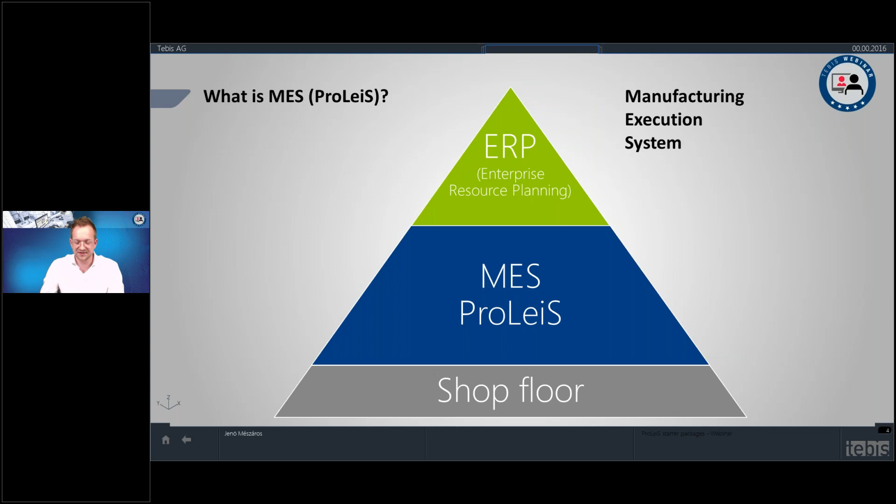So therefore, we have Proleis. Proleis fits in between these 2 levels perfectly to make sure that whenever you get a new product, a new project, it gets planned directly through Proleis into the shop floor level, so that all the operators know what to do next without spending a lot of time just for team meetings.

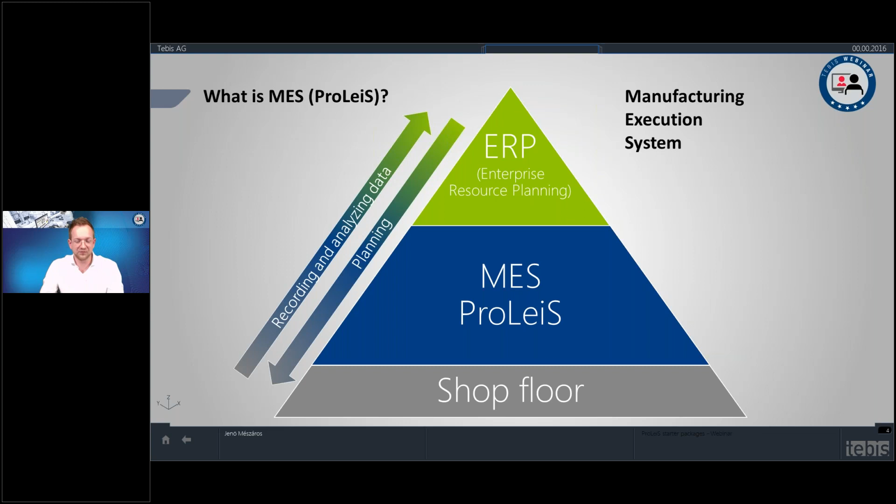And the same way back, when you produce your product, you would like, of course, at the end, to analyze the data. So, of course, you would like to know what actually happened during the time where you manufactured the product. How much time did you spend? Was the calculation correct? Did you win or did you just lose money with that calculation? And this is where Proleis as MES software helps you.

In between all these milestones, you have different departments and different operators working together on one project. So for example, when somebody is doing the detailed planning for the shop floor, he needs to make sure that the material which you might not have in stock is getting ordered and delivered before you actually need it at the machine. You need to make sure that the NC program is ready before you go to the machine.

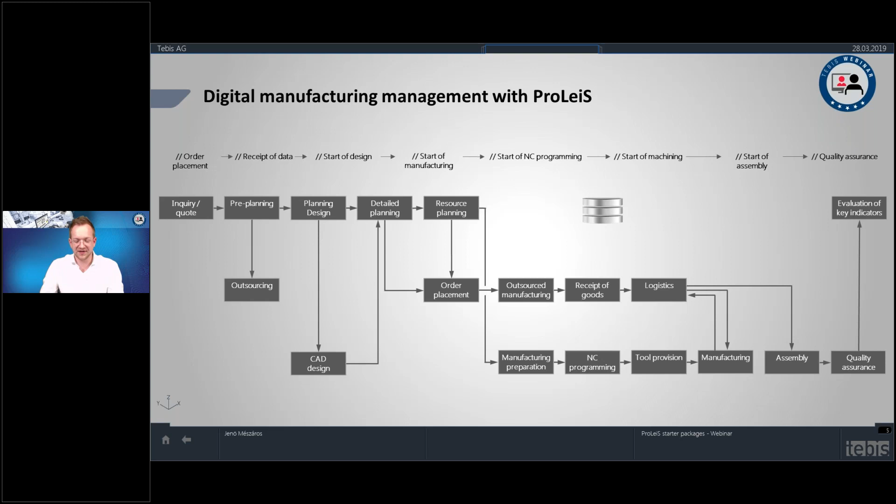And you need to make sure that everything is up and ready in the assembly area before the assembler actually gets started working to assemble your product. So you see, all these different areas need to work together. They need to work hand in hand to make sure that your production goes really smooth.

And to do so, you need to monitor your project. And this is actually where Proleis helps you. Proleis, as a server-based project monitoring software, or as an MES software, helps you to monitor all these different areas. Proleis is connected to all the different operators, of course, and to the machines. And whenever something takes a little bit too long, Proleis will immediately see that and can help you fix the problems before they begin to be real problems.

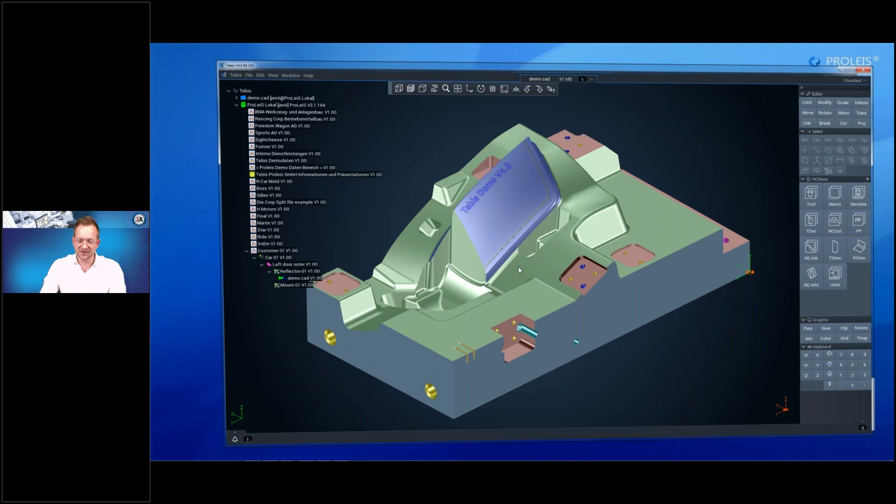If I check in the file again, it gets saved back on the server and it will be available for Peter. If Peter checks out the file, it gets blocked again. So when somebody is currently checking out the file, you can still have a look at the old version of that CAD file. You can still open and read it, but you cannot really change this file as long as it's checked out by another person.

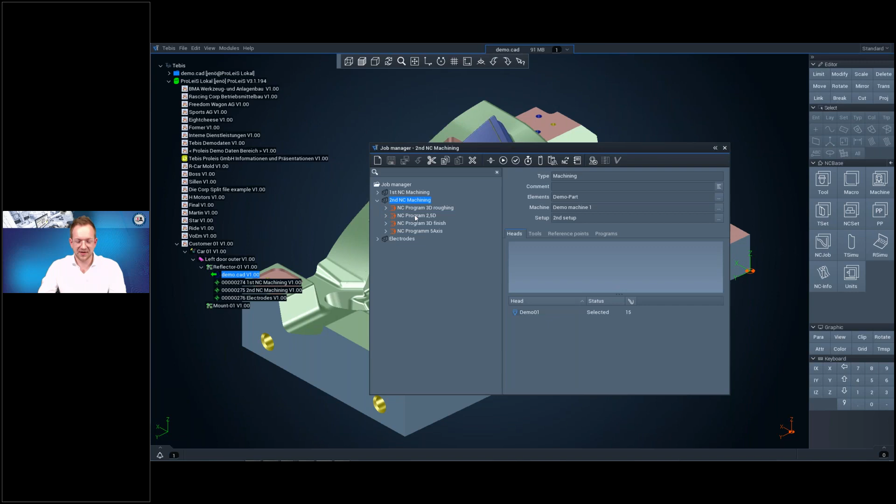So let's do a program for this file. Go to my NC job, and I just create a new program which exists already on that file.

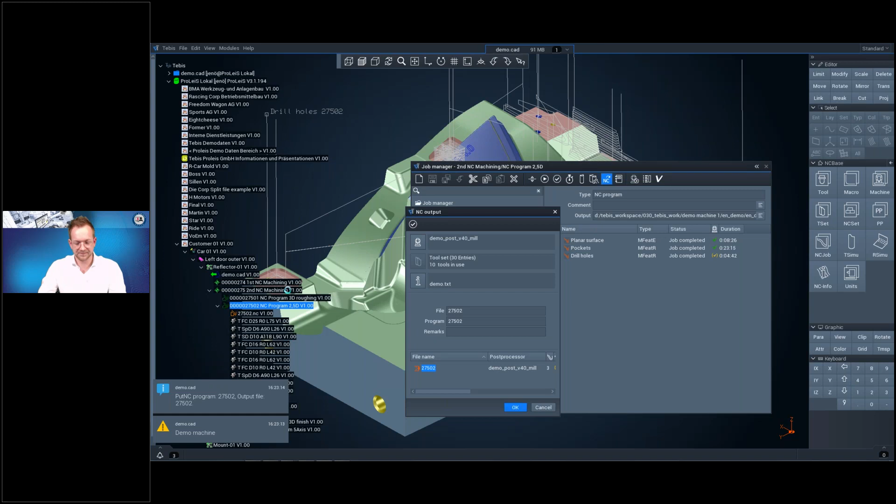What I see already on the left side is that something happens underneath my CAD file. There's a new folder structure and different files currently get created while Tebis is working on the NC program. So what happens here actually in the background? Tebis has created folders for all these different programs underneath my CAD file. And the one I would like to create, or actually created, got attached underneath my project as well.

So I do have the NC file itself underneath my CAD file, which I could also like to open if I would like to, with the notepad, for example.

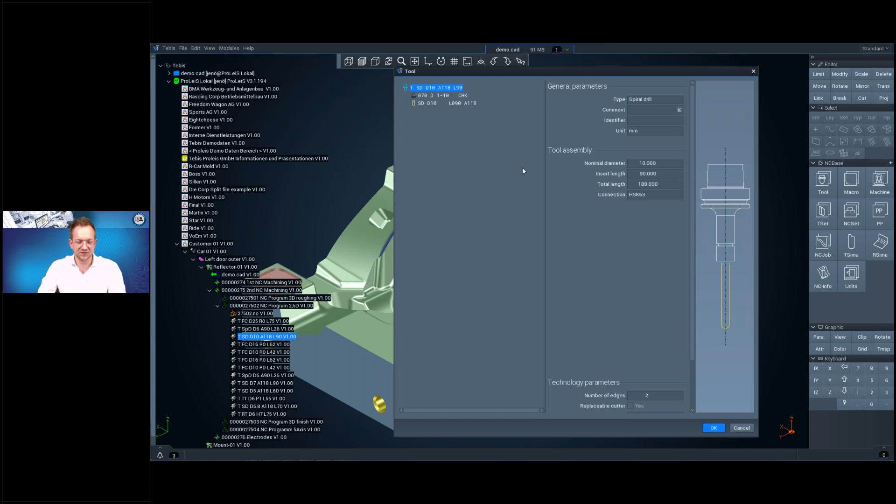Underneath the NC file itself, I also have information about the tools being used for the NC program. This information is visible for everybody working in Tebis. For example, operators on the shop floor with the Tebis viewer can just have access to the tools necessary to do a program.

But even more interesting is that you can send your program directly to the machine. This program gets sent to the machine as a copied file, so that NC program file will get available directly at the machine. Nobody has to copy it manually or go to a Windows directory to search for it and find it. It just got sent directly to the machine over the network. This is something I can do directly in Tebis.

Once I have done this, I see this little blue-green icon on the NC program, which tells me that the program got sent already to the machine. So whenever I change anything on the CAD file, I know this program got already sent, and I'll be able to make sure this specific file gets deleted so that nobody's using maybe an older or wrong version to do the machining.

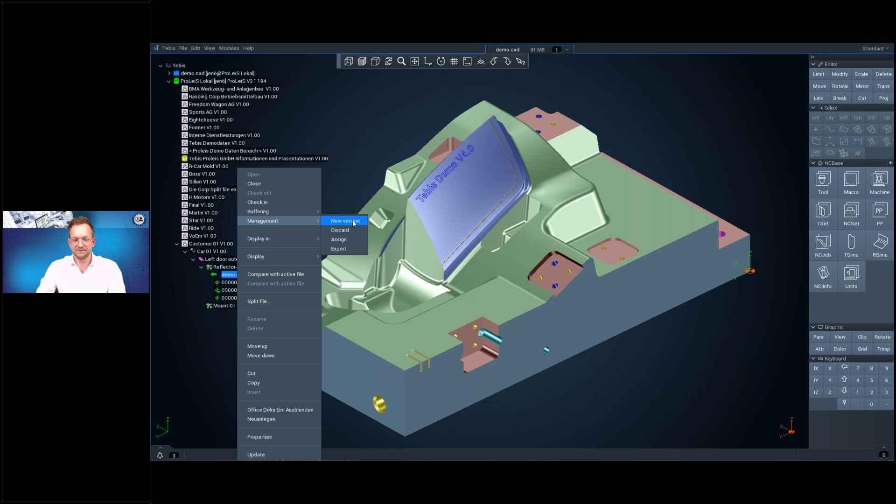Once I change anything on this CAD file, I'll be able to save it as a new version. If I do so, a new version got created called version 1.01. At the same time, I got question marks on my programs where Tebis is telling me the program got created with a different version of the CAD file. So an older version of the CAD file was being used to create this NC program. It might be possible that this is not correct anymore.

So let's have a look at some new, more possibilities we have on here, and let's use another example. Again, I look for a CAD file I would like to upload and attach it directly to my project.

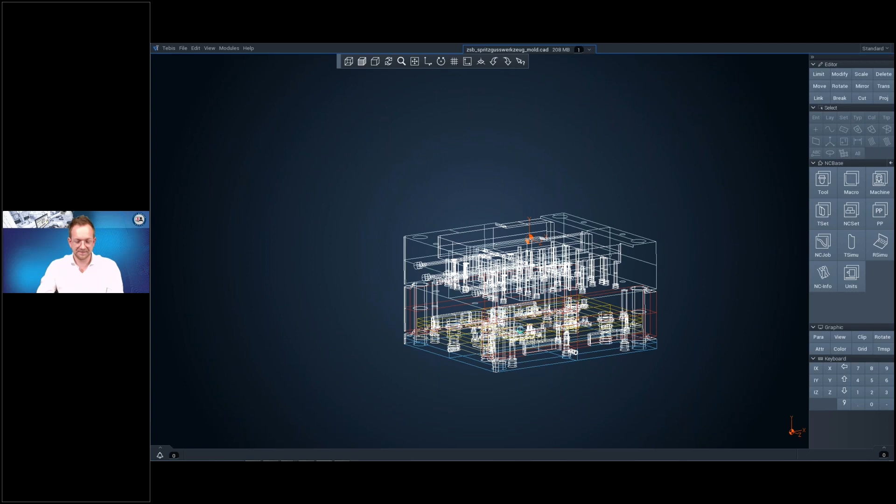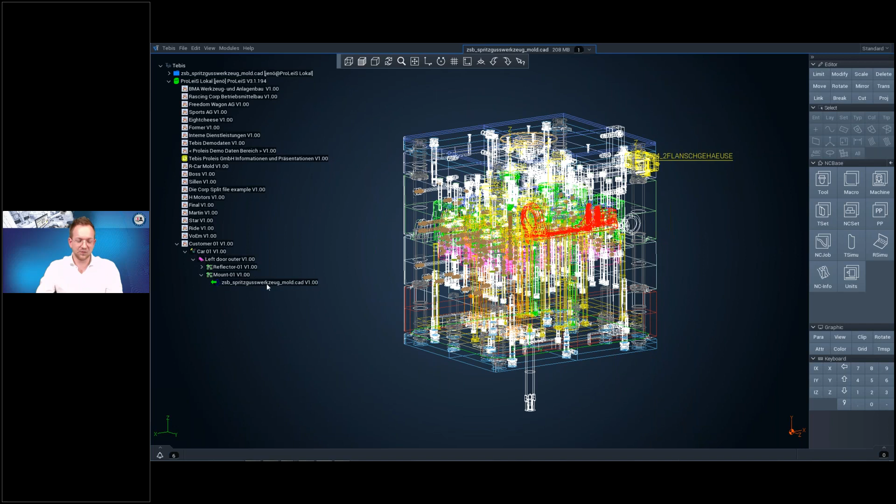This CAD file is a little bit different to the other ones. It's a complete mold with all its single parts, already assembled, with every single part inside that specific CAD file. I got this CAD file actually from the design department and imported it to Tebis. As I see here, it has a proper layer and filter structure where I have all these different single parts as a different layer available.

So what is normally my work before I start working on the NC program? The first thing would be separating these single parts into different CAD files to make sure I can change these files and prepare the NC program without changing anything on the whole assembly. To do so and to make it easier for you as operator, we have the file splitter. This little tool helps you separate components and parts into different CAD files.

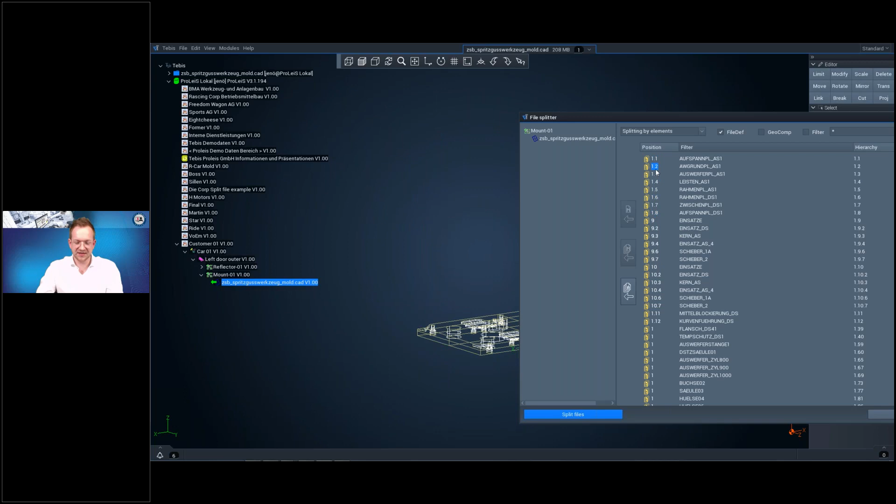It's pretty easy to use. You just select, with Control or the Shift button, for example, the positions you would like to separate. The position I have selected gets displayed in the background, so I can easily realize which one I currently selected. I then have to create a new subfolder structure, which you see already on the left side, one folder or one position per component.

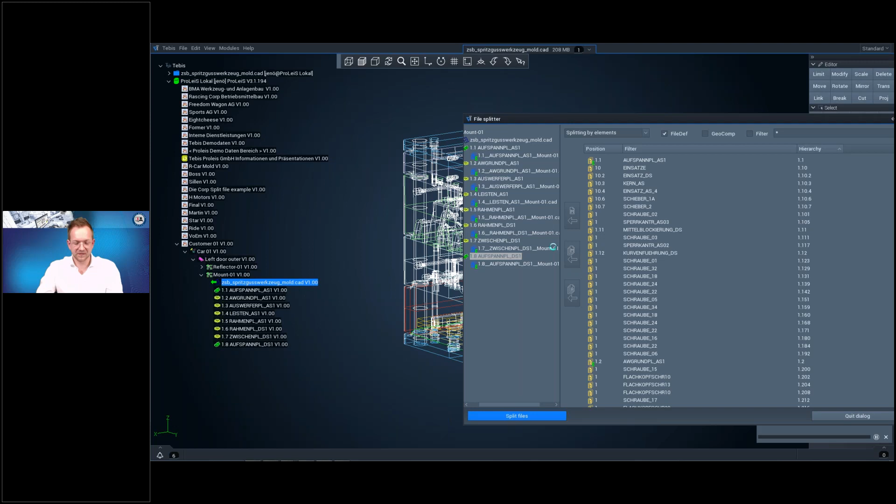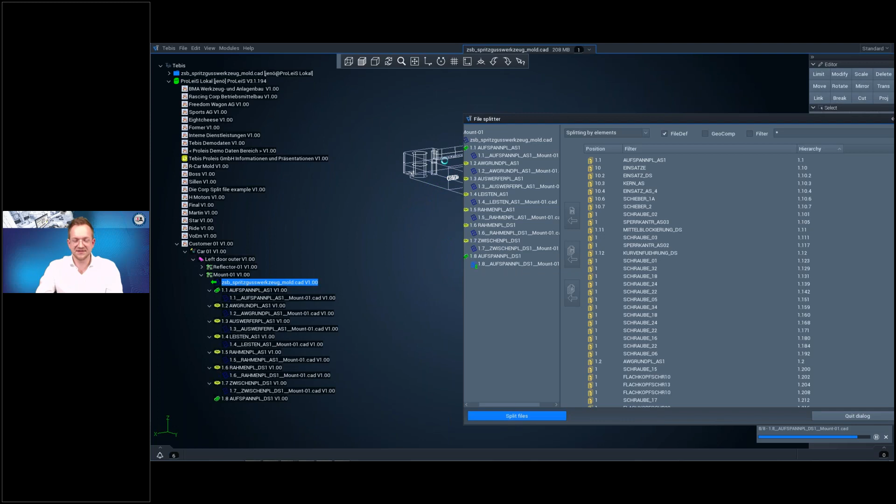And once I split the files, Tebis creates for each single component a new CAD file, which only includes the information of that single part. So you can split, really easily and in just a small amount of time, this complete assembly into separated CAD files, into separated files, to make it possible for the NC programmers to start working on this.

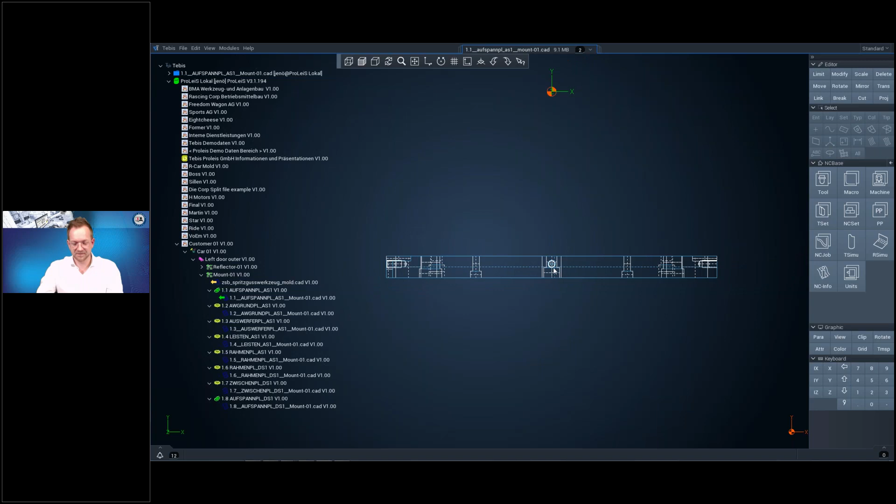So let's have a look. This is still my whole assembly. Let's go to one of my plates, position 1.1. Once I open it, I see that this is really just a single component, and I don't have anything else inside my CAD file.

So again, this file got attached to my project, and this CAD file got separated automatically by Tebis using the split file functionality. So my NC programmers can now start working on this project, and there they can work on different parts at the same time just because I got them separated.

One more piece of information: all these files got not just separated, they are also immediately attached to my whole project and to the Proleis data management. So I don't have to upload them manually anymore. They just get uploaded automatically and are available and visible for everybody working with Tebis and Proleis data management.

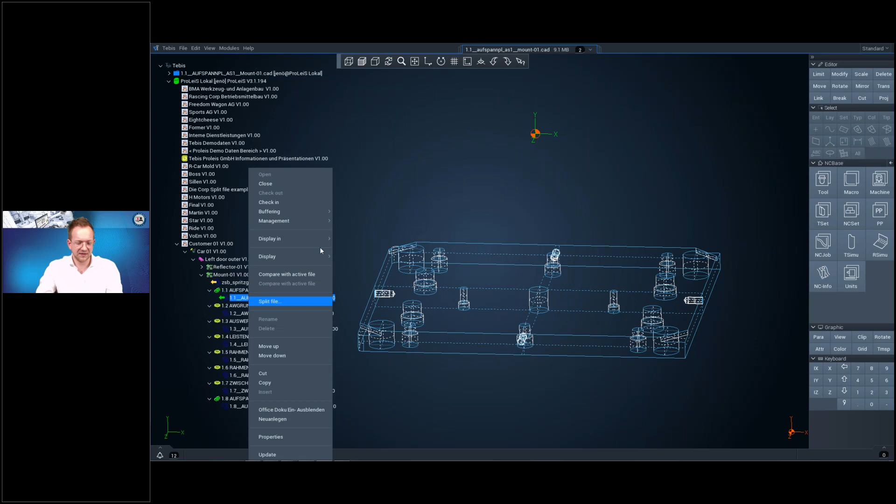So, but what happens actually when a designer changed anything on this assembly? This is pretty important. One of the designers has changed something on one of these components and gave me a new CAD file, which I need then to import to the system as well.

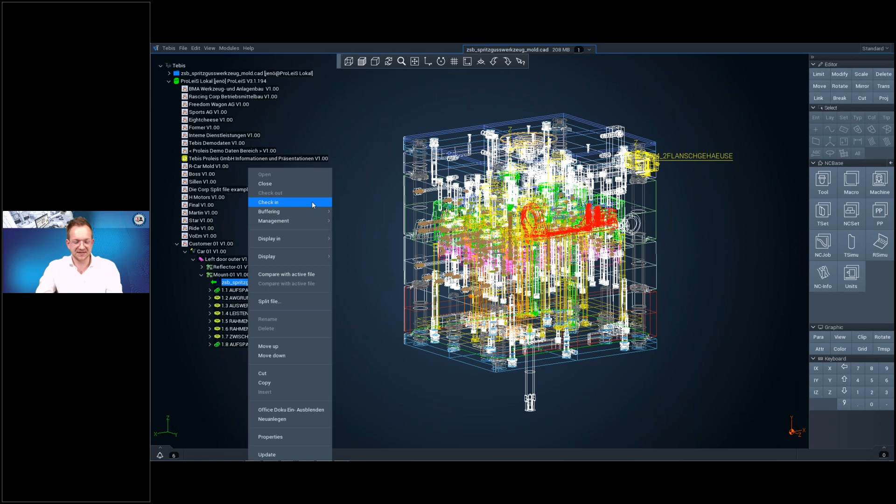But as I said, I don't really know what they have changed. So let's get through this example. Let's get checked in my file again. The very first thing I have to do is upload the new file I got from the design department into the...

Proleis data management. Tebis will realize already that this file already exists. So now I can tell Tebis I would like to keep it as a second file, attached as a second file, and the older one will not get changed at all. Or I can overwrite, which means it will bring it into the system but create a new version. So now I don't have version 1.00 anymore. Now I have version 1.01, which is the CAD file I just uploaded to the system.

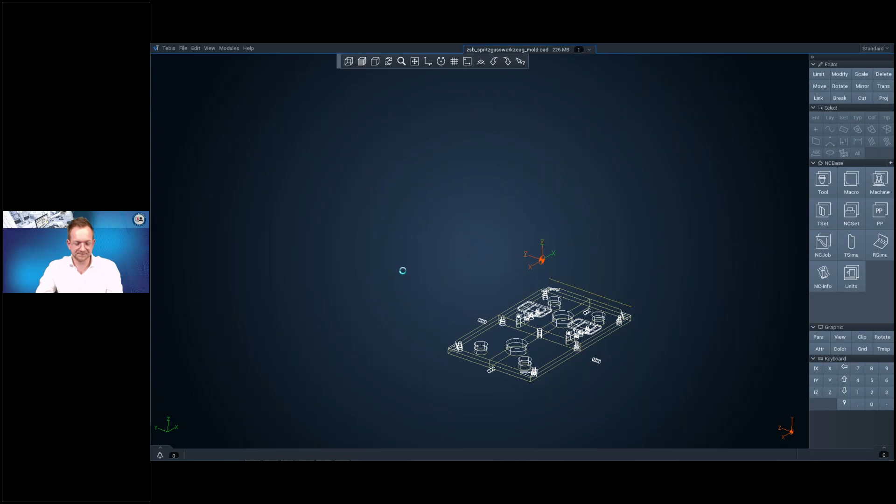Let's check out this file again, bring it to my local system, because I would still like to know what the designer has changed.

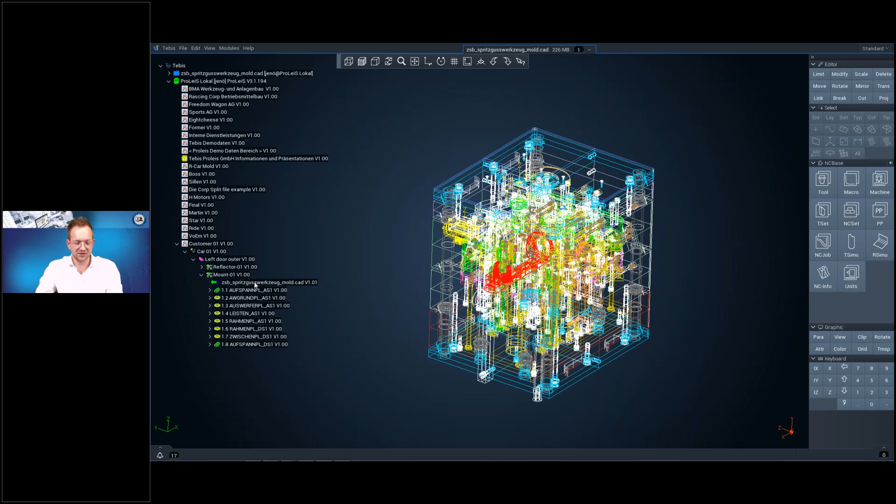So once checked out, I use the same function in Tebis again, the split file function. And I again would like to have a look at the first 8 positions, the first 8 components of that assembly. But this time, before using the file splitter, I activate the function GeoComp to compare the geometry of each single component.

So what is Tebis doing now? Well, Tebis is again separating the single components and attaching that to the Proleis data management, but only if anything has changed on the geometry of a specific component. If there was no change done, then it will not create a new single split file. So again, Tebis checks if there was a change done on any of the geometry of the single components, and only when there was a change, it will create a new CAD file.

This is a really big time saver. Of course, this time Tebis needs a few seconds more because it will check and coordinate every single component before it creates a new one or not.

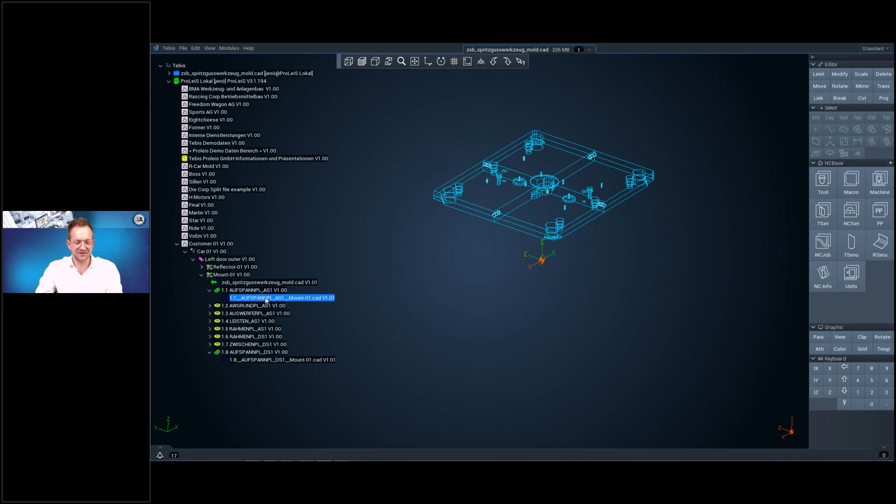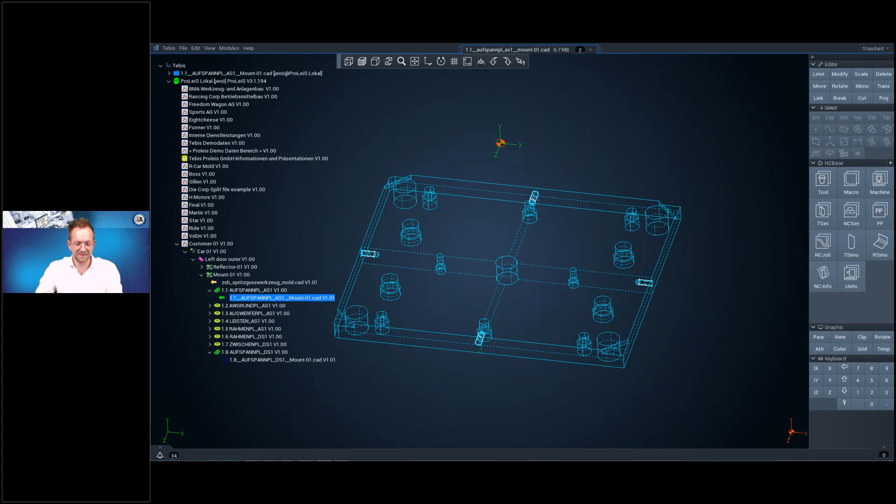So let's figure out what actually has changed on this plate. To do so, I can just make a right click on it and compare with the previous file. Here I see all the previous versions of that specific component, but at the moment I just have one previous version. I do the comparison, and this is just a red-green comparison inside Tebis. Both files, the current and the previous version, are already selected here. I just have to press OK.

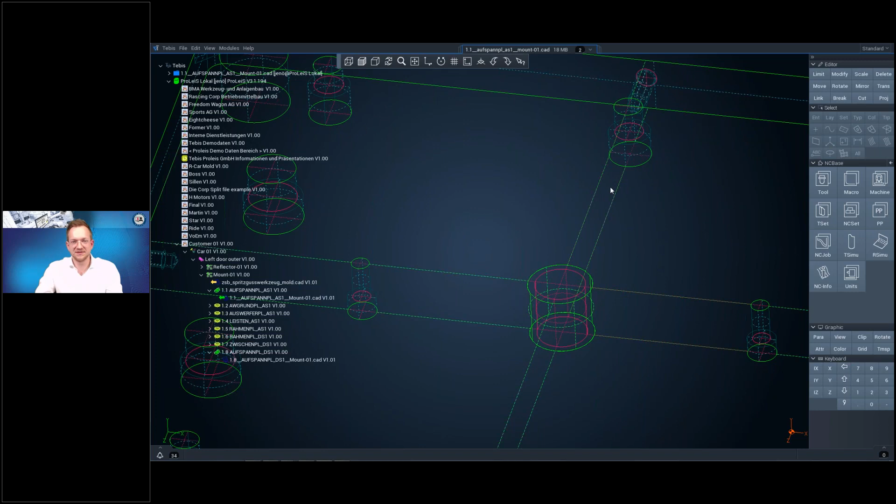And next, I will find all changes marked with red inside the CAD file. So that is pretty awesome.

Let's have a look at our benefits with the manufacturing data management again. It's not possible for you to lose any data anymore. Once the files are attached to the Proleis data management, they are attached forever. The only people who can actually delete these files are the administrators. Versions are managed by Proleis, so you can make sure you always work on the right version, the latest version. You don't lose any time because you don't have to look around on a confusing folder structure to find the right files, since everything is really managed inside Proleis.

Right. So that's about it for data management. Of course, I could speak a little bit longer, but I guess that gives a good overview about the possibilities.

Yeah, Jenny, thank you very much for the moment. I'm always thinking that it's really pretty cool. Maybe not everybody realized that all this data management that a CAD/CAM user has to do is all inside the CAD/CAM system Tebis. This is the really cool point about this combination of Proleis and Tebis: when dealing with data management, you don't have to leave the CAD/CAM system, you do everything in the CAD/CAM system. I think that's really cool.

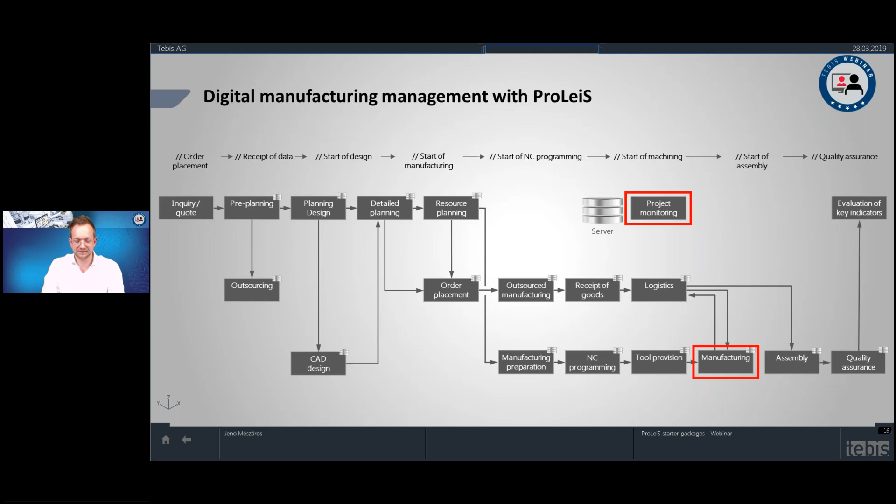So let's have a look onto the milestone project overview again and where the machine data acquisition actually fits in. Also here again, the project monitoring as always, but in detail, we are looking into the manufacturing area, so the machine status. Well, there are many machines in your shop floor.

And how would it be if all machines are connected to, for example, Proleis, to send over the current status? To make it also possible that you can run your machines without any operator, maybe over the weekend when you have long-term products running on the machines for maybe, I don't know, 40, 50, 60 hours.

That would be great and you could save a lot of money, but if one of the machines gets stopped, what happens then? Maybe it gets stopped right after setup, nobody is at the shop floor, and then on Monday morning you realize that the machine got an error and nobody could fix it, and you lost a lot of time. So a system like Proleis can identify the current machine status all the time from everywhere.

And in this case, you can make sure that you send an operator right to the machine to get the problem fixed and get it up and running again.

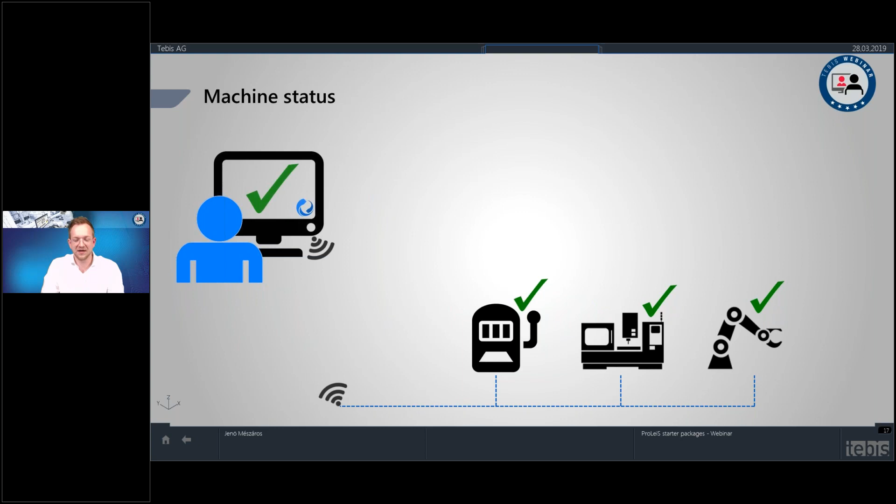How about the detailed qualification of your downtimes? Well, in this case, we see a Proleis computer client or tablet, Windows-based, next to the machine, connected to the Proleis server. And whenever the machine gets stopped, you'll see a pop-up window with reasons why the machine might have stopped. The operator can just press one of these buttons to make sure that this reason gets saved into the database as the reason why the machine was stopped.

In this case, you get the details. And then finally, of course, you would also like to analyze this data. So whenever you have any downtimes, we have charts and the possibility to analyze this information to make sure you can identify the problems and make sure they're getting solved as soon as possible.

So let's have a look into the software, how it looks there. With the starter package of Proleis machine data acquisition, you see at first all the machines connected to Proleis. You see their current live status, and you'll be able to tell immediately if the machines are running or not.

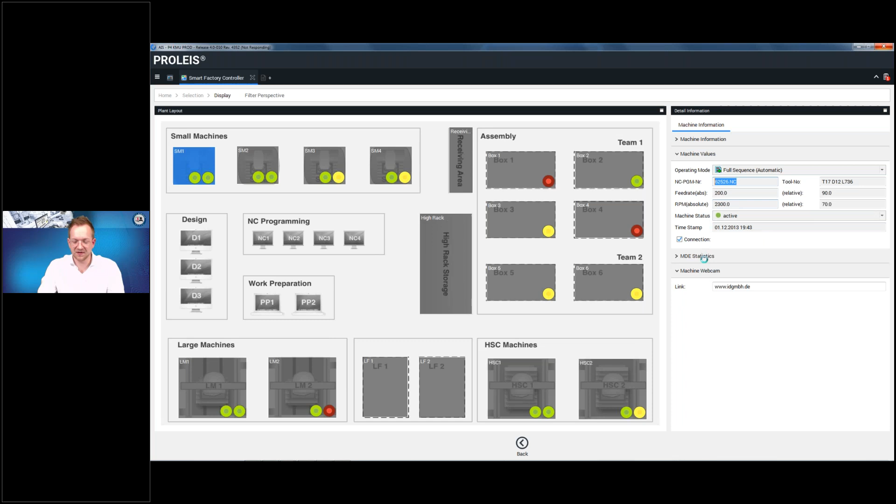We also have the possibility to have a look onto your whole plant, so you see the position of all the machines you have, and again, the current status of them. Once I click onto one of my machines, I get more detailed information on the right side, like name, cost center, and more importantly, what program is currently running at the machine. Feed rate, for example, what currently happens at the machine, and if you like, you can also get the current machine status.

Proleis with the machine data acquisition gives you the possibility to analyze and record all the production times and downtimes with an easy-to-use software. You can qualify your downtimes, so whenever the machine was stopped, you get the right reason why it was stopped. You don't just know that the machine was stopped, you know the reason. You get the current status of all the machines, and you can make sure these problems and stopped machines get solved as soon as possible. So that's about the machine data acquisition.